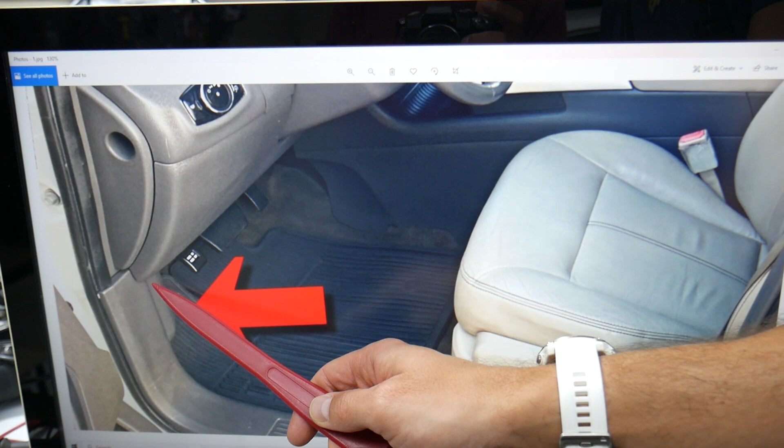For the powertrain control module fuses, first we need to open the driver door on that Ford Edge. Look under the dash, come into the footwell compartment. This is the parking brake pedal, and this is the hood open handle. Behind it, on the left side, you have a cover that you need to remove, and you're going to find a fuse box with a layout like this one.

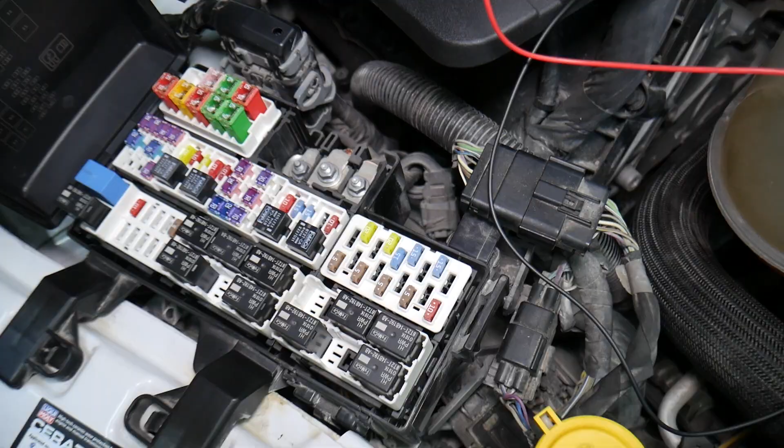Before we continue, let's explain quickly why it's always a good idea to test fuses and relays. Fuses - you can't often see if they're burnt or good. Sometimes they may seem perfectly fine, you think it's a good fuse, you put it back in, and you end up spending money and time on parts and problems that do not exist, when all you had to do was test your fuse, find out it's bad, and replace it to fix your problem.

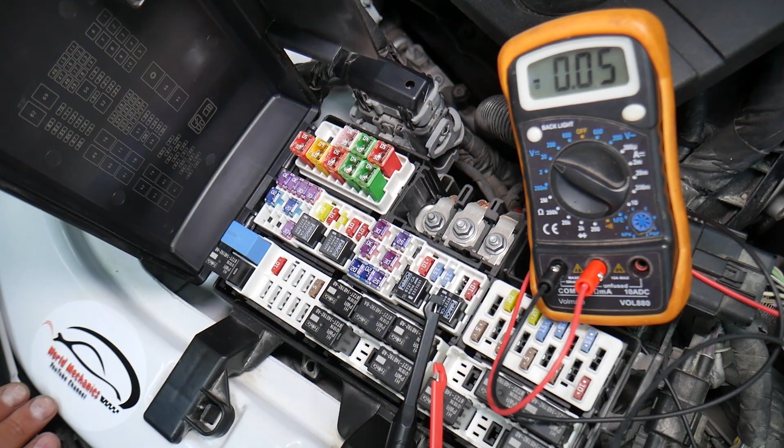So guys, the fuses that we need to check - multiple fuses, just one in this fuse box, then we need to go to a different fuse box and check 6 more.

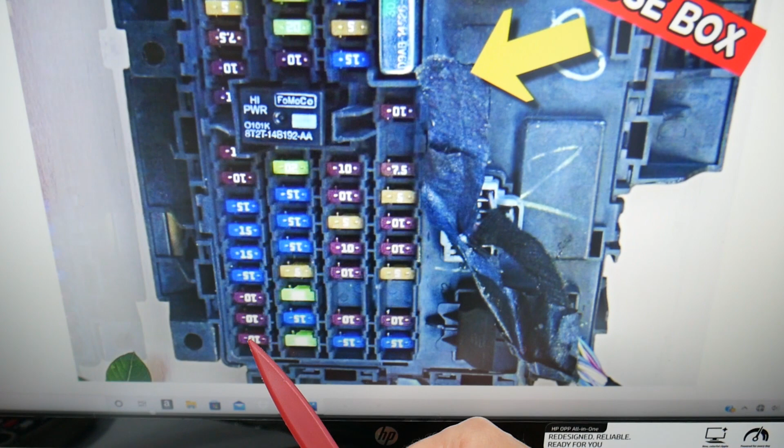Next, open the hood on your Ford Edge. On the driver's side, you have a fuse box right here on the right side of the battery. Press these 2 tabs, open the cover, and on the back side underneath you're going to find a fuse box that looks like this one.

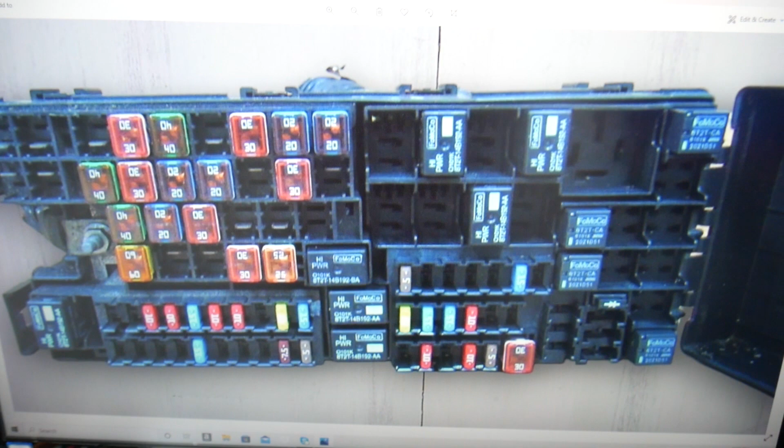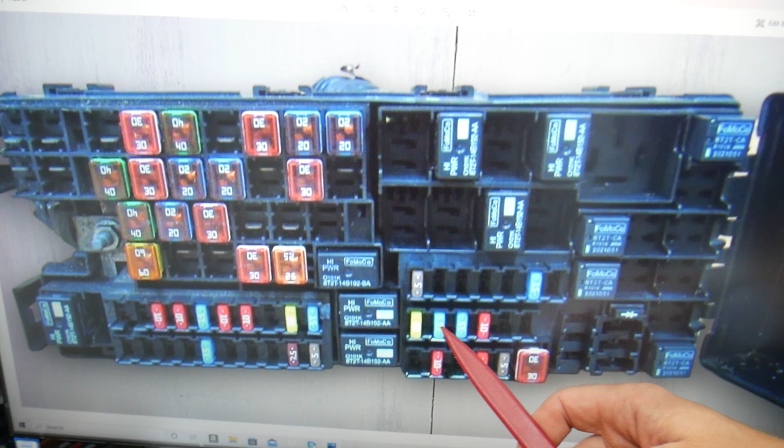Here we'll need to check a few more fuses, actually up to 6 of them, and here things get a little bit more complicated. We need to start with checking fuse number 67. If we come to that row of fuses right here, you see that row - that's fuse number 67 we need to check, 68, 69, and 70. These 4 fuses will need to be checked.

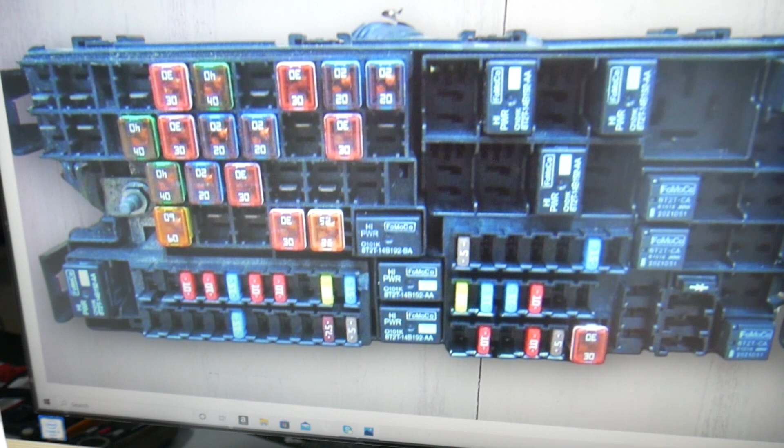After that you need to find fuse number 86 - we're talking about this fuse right here - and next we need to check one more, which is fuse number 90, and fuse number 90 will be that 10 amp fuse right here. All these fuses will need to be checked on Ford Edge.

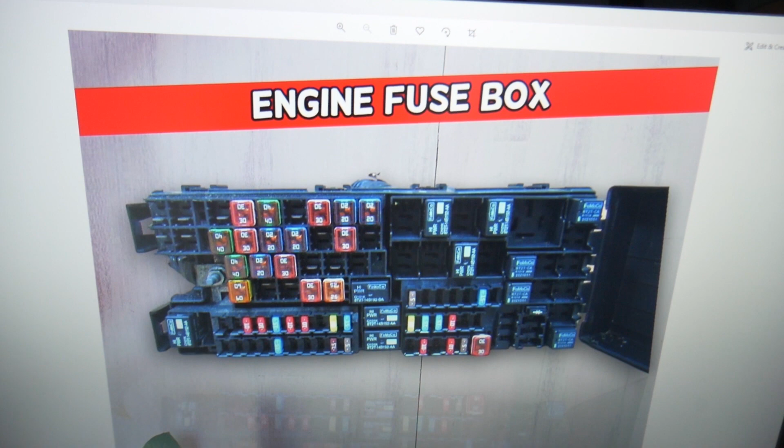This generation Ford Edge has all kinds of different fuses and relays - fuses and relays that could be really hard to find, especially if you live in a small town, if you're in the middle of nowhere. One time we needed a replacement fuse, we couldn't get one, and as a result we were stuck there for a few days until shipment came. So we recommend keeping some spare ones in the glove box for peace of mind, so that thing doesn't happen to you.